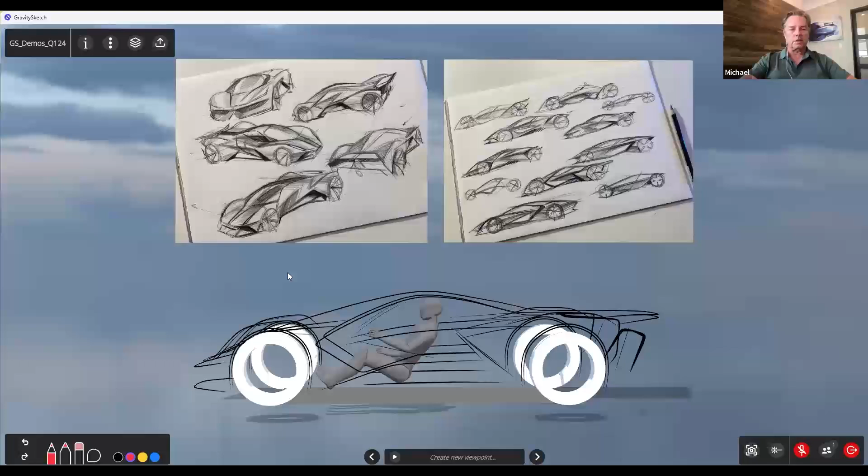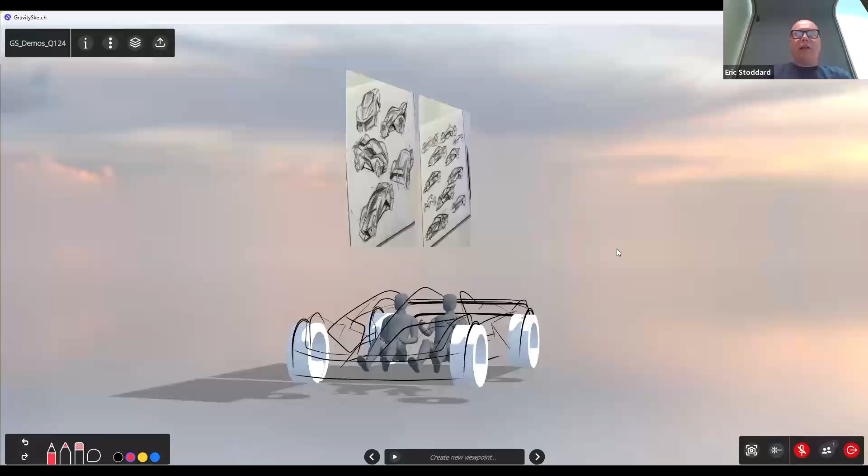So this is just an example of a quick 3D sketch based on some 2D sketches. I took this middle sketch and traced it in the center plane, then started extracting the lines and getting a really nice 3D wireframe around a wheelbase - the wheelbase and tire size were from the Porsche 918 supercar.

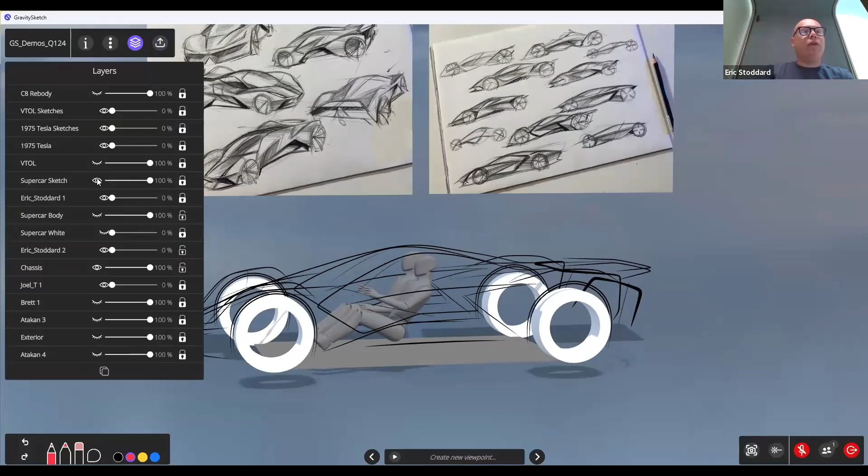And then through sub D modeling, I'll just switch over... so this would be the outcome of that. You can see the surface quality is comparable to anything you could do in Alias Sub D or Blender. It's not class A NURBS modeling, but it'll get you as far as you can go with Blender or Alias Sub D.

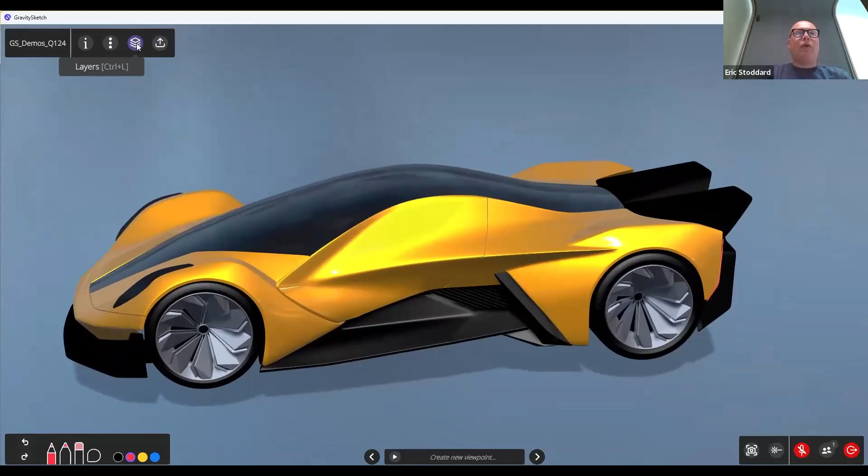So there's one example. This is just a sort of typical sketch-to-model example. And then let's see, let me go.

This is something I did with a bit more precision. This was taking a C8 Corvette - I found a CAD data model online - and I held the greenhouse and glass planes, with some engine components underneath. What I wanted to do was create a new body for it, something a bit cleaner and fresher than what's on the road today. So this introduces more precision using some existing known components.

There's a full interior in here - you can't really see it, but there's a C8 Corvette interior in there, it's all there, so I'm basically working around existing components. You can get quite precise if you want.

And then this one's really interesting - this is sort of a resto mod Porsche 914. In this case, I did this model in augmented reality. The new 3D headsets are capable of working in mixed reality or augmented reality, where you're basically in the real world, in the real studio. I had a client with a real original Porsche 914.

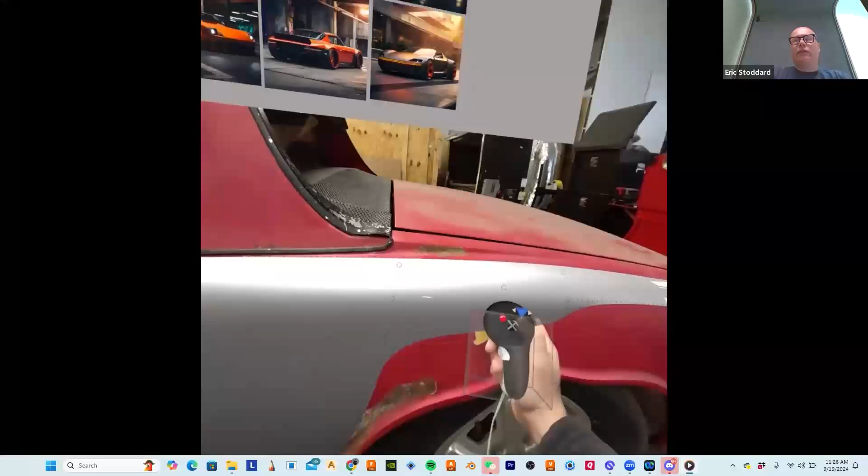That's great. So that's the first pass I did, and then the second pass - you'll see in a moment - was doing the wireframe, just capturing all the key lines. So here you can see where I've retopped the entire body side of the car. Now I'm going to go in and pull out the fenders to get my wide body.

That's really good. You can see those sketches on the wall are actually digital sketches that I can only see through the headset. That's really nice. So working in augmented reality is really changing the game.

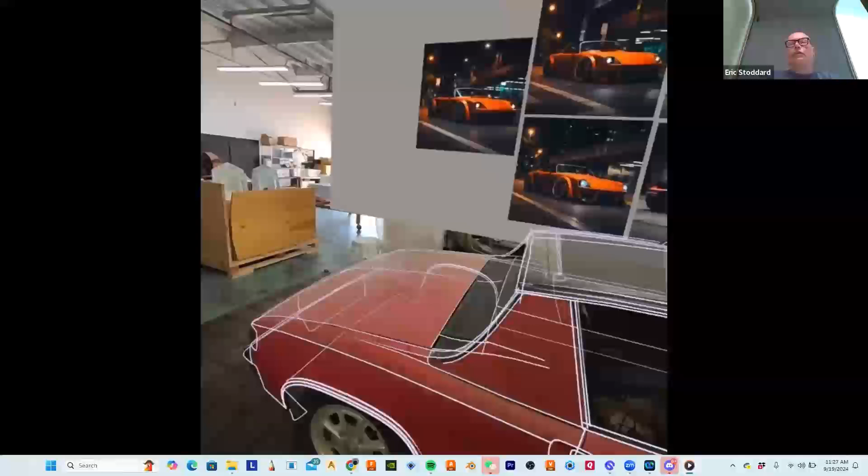So here's where I'm tracing the car with lines. There is a little bit of inaccuracy in this process. I'd give it 5 millimeters accuracy, but for a stage 1 clay model, that's adequate. Now I'm looking at the digital surface model on top of the real car, sitting on the plate where the real car is. And you're actually seeing through the greenhouse, seeing the interior through the greenhouse.

How are you ensuring that your surfaces that you're using with the two controllers are sticking right to the surface of the physical car? So that's where the inaccuracy is. It's sort of the way you hold the controllers. If you know where the point of origin is, I kind of hold it a certain way so the point of origin's on the surface.

I've lately been experimenting with a new stylus by Logitech which is coming out in October, and it's gonna be way more accurate, because now the point of origin is exactly mapped to the tip of the pen. The only limitation then becomes the tracking capabilities of the headset and how accurate the tracking is. I do think there's still a little bit of inaccuracy with that, so we'll have to see some tracking improvements.

Now here's the car sitting outside in the real world. So I took the headset outside, and here I'm walking around a digital car, and it looks as real as any other car. That is really good.

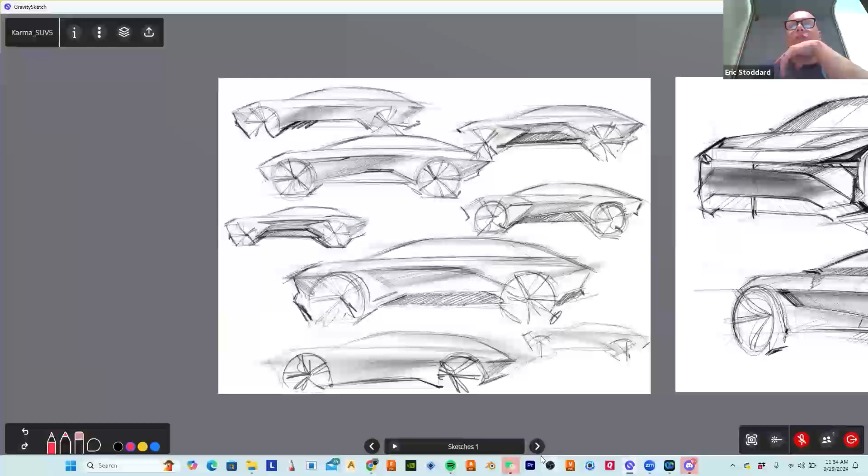Anyway, I just wanted to show this example here - just trying to move the menu here. So this is sort of a complete project that I did from sketch to full model. These are just some rough sketches. This would be for a Karma luxury SUV.

Used some Vizcom, some AI to sort of do a quick render out of the design. I spend very little time in sketches now - I just sketch to get the basic idea, and then I go straight to 3D.

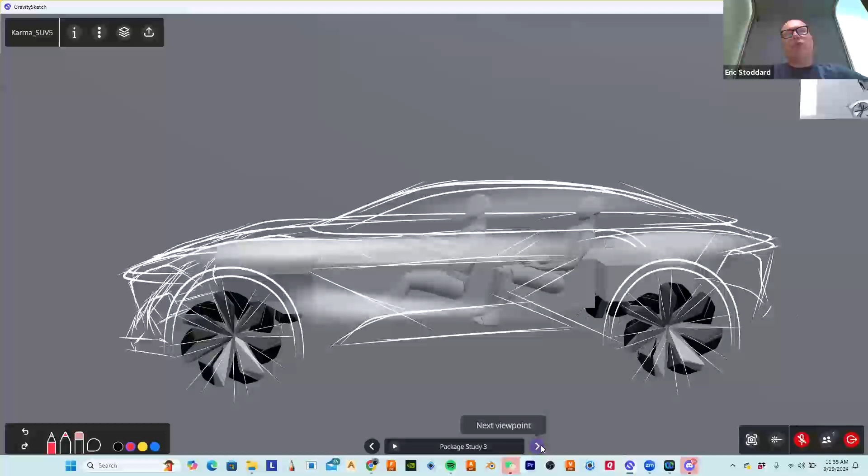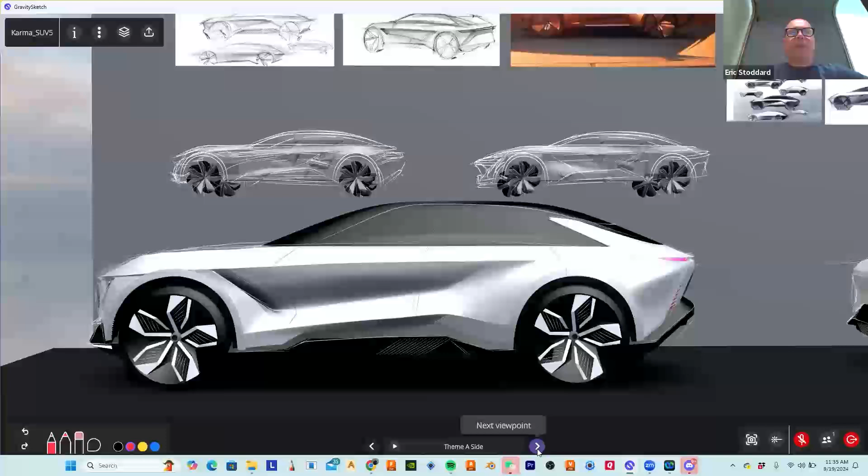And then this is just a quick 3D sketch over maybe some package elements, some mannequins, some drivetrain dimensions - just a quick study. And then I go to a series of, you could call them scale models, but these are more like a sketch. I also have a technique where I can make it look like 3D Photoshop, where there's actually like 3D airbrush and line work and everything.

So one of the things I've been exploring is what are the roles now of a designer and a sculptor? It seems to be blurring quite a bit, where a lot of the interpretive 3D work is being done directly by the designer themselves. It depends on the studio, it depends on the designer, it depends on the design leader, whether they prefer to have designers just sketch in 2D, or whether they encourage designers to work in 3D. But there's definitely a blurring of the lines and a hybridization of the role of designer and creative sculptor.

I'm curious to hear some opinions about that. What are your thoughts?

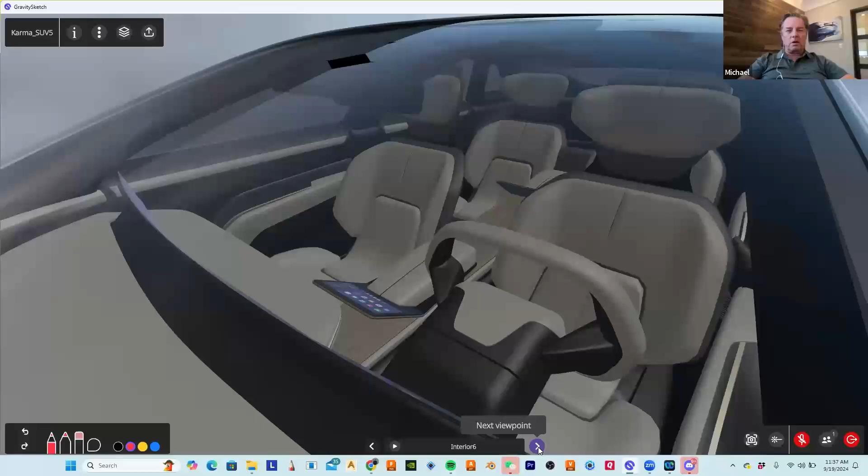We are seeing less focus on having the Alias CAS modelers build the concept model in Alias. That's a big deal, because let's say it's an advanced studio working on a number of concepts - now they're getting a Blender model most of the time, or some other tool, whether it's Modo or whatever. There's really no restriction anymore as to what tool they can use. It's not a requirement per se, but the request is for a 3D model to be provided instead of a 2D sketch. So the workflow we're seeing is the CAS modelers doing more of the Class A surface development and less focus on concept model.

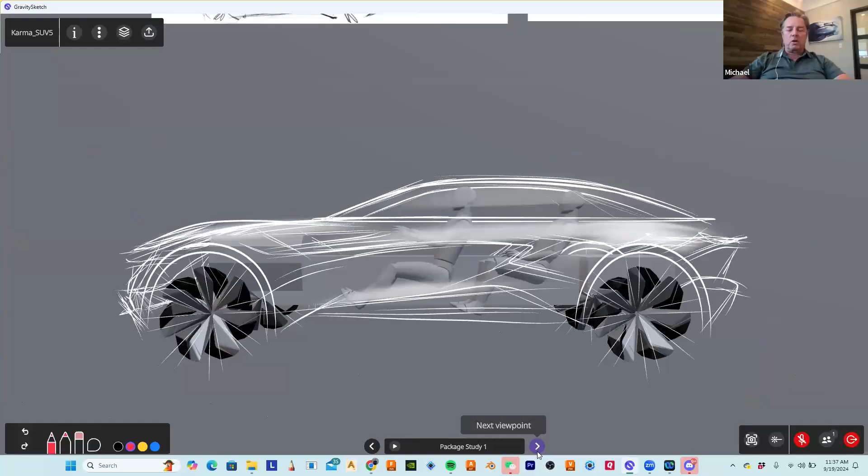Which does create a shorter design cycle, because you're not waiting for interpretation of the sketch and the modelers trying to chase down the designer asking 'what did you mean by this?' and so on. So it's becoming a lot more efficient that way, and that's kind of not the requirement, but the criteria that we're seeing.

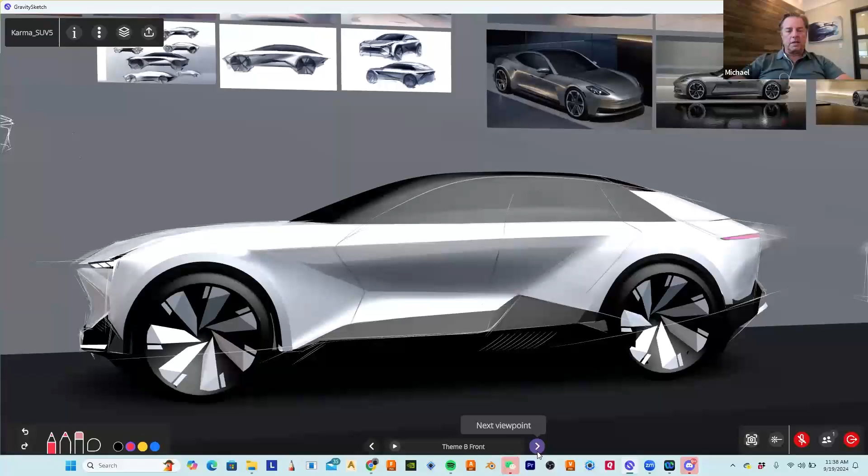There's still supplemental sketches that go along with it, but the majority of the time now the responsibility is on the designer to work out some of the proportions and things like that upstream in sub Ds, whether it's Alias, Modo, Maya, Blender, or other tools.

I'm surprised at Gravity Sketch. I didn't think Gravity Sketch had this much capability, right? I was always kind of envisioning that it was strictly 3D sketching. But what you're showing here is a completely different workflow than what we're seeing. And it's actually quite good, right?

Because if you have multiple sessions where someone like Freeman or Jay are interacting with it, and the model is more believable because it's sitting on the studio floor, that's really impactful. I think you can get a lot more things done that way. Oh yeah, it's amazing how quickly we're cranking out design concepts. And we're doing presentations as well to stakeholders. We're putting the headset on them and getting sort of real-time feedback from them as well.

Anybody else have input on that as far as what you're seeing, the modifications in the workflow? Yeah, from my standpoint, it's really impressive just to see. This is really the only software I know of where it's like a design studio in the software itself. I'm seeing your sketches on the whiteboard, and you have little iterative models there, and then kind of the finished piece. And obviously, I'm assuming this can be one-to-one, so you can walk around the car. It's just super impressive.